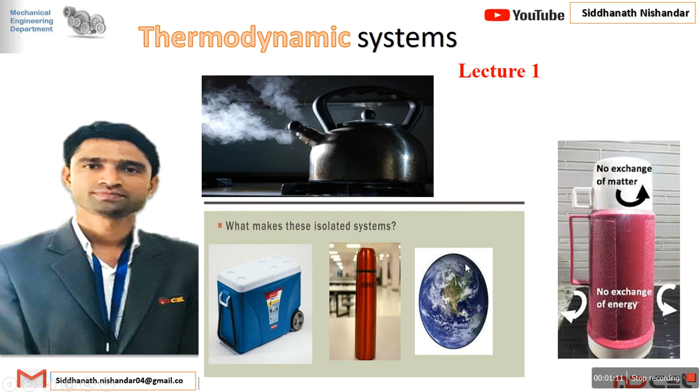Thermodynamic system, lecture 1. Now, what is meant by thermodynamics?

Thermodynamics is the science of energy and entropy. Now what is meant by entropy? We're going to discuss that in further chapters.

In today's lecture we just focus that thermodynamics is also called the science of energy, science of motion. The word thermodynamics is derived from a Greek word. If you divide it into therm and dynamics: therm means energy, and dynamics means motion, power, transport. So thermodynamics is nothing but heat power, also called energy transport. More importantly, it is the relationship between heat, work, and forms of energy. So thermodynamics is generally the science of energy, science of motion, and always correlates the relation between heat, work and forms of energy.

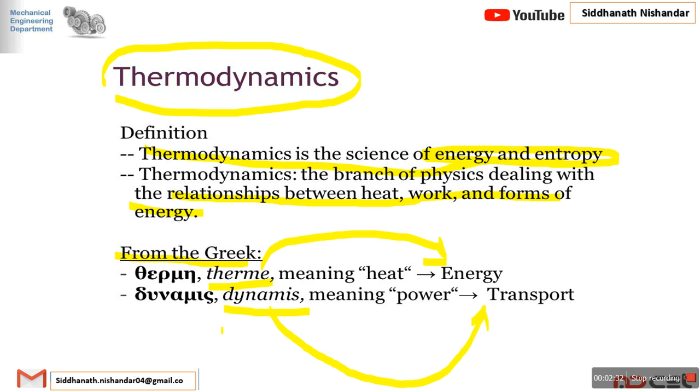This thermodynamic system is divided into two parts. In this first lecture I am going to cover the fundamental definitions and concepts, and in the second lecture, part 2, we have to apply these thermodynamic systems.

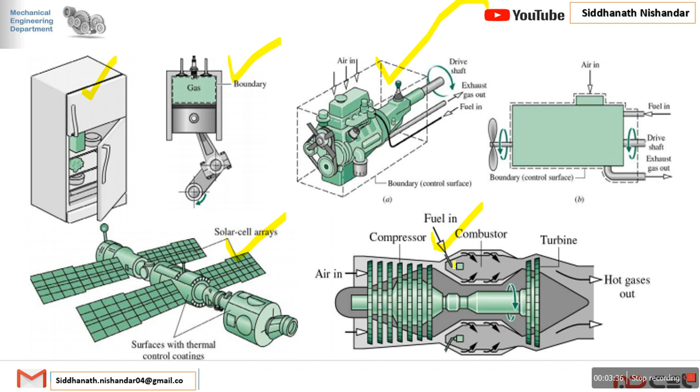Let me start with the definition of system. The system is the particular region or area or space where some thermodynamic activity takes place. If you take a particular region from the universe under study, it is also called a system. Everything outside the system is called the surrounding, and the system and surrounding are separated by the system boundary.

Now let's apply these definitions through an example. We take a piston cylinder arrangement enclosed with gas. In this case, the system acts as the inside surface area of the cylinder, which is equipped with the gas - that acts as the system.

Everything outside of the system - the outside area of the cylinder - is called the surrounding, and the system and surrounding are separated by the system boundary. The boundary acts as the inside surface area of the cylinder, and the system includes the whole volume along with the gas.

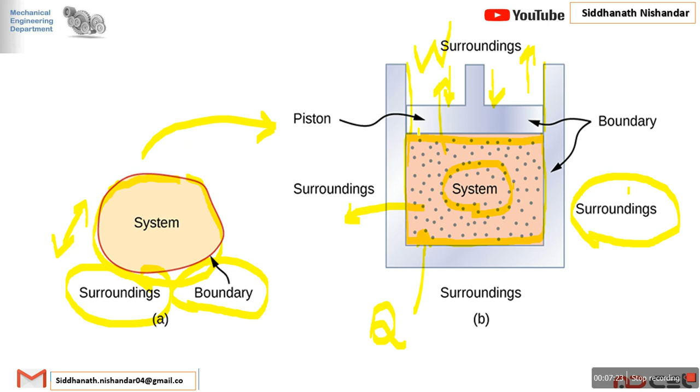When applying W, the gas compresses and releases heat to the surrounding. When supplying heat, the gas expands and gives W. So there is a transformation of energy according to thermodynamics - a relation between heat and work. Similarly, we understand the outside area of the cylinder acts as the surrounding.

Okay, now the very important terms, the types of boundaries. If you see in that example, the boundary is movable. If you're going to compress this gas, this boundary decreases.

When applying force, what happens? The system boundary decreases. And when I'm supplying heat, that system boundary increases. So such type of boundaries are called movable boundaries.

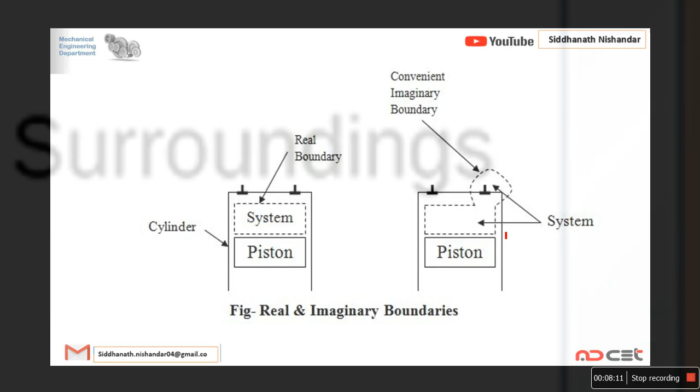Now if you see the further slides, what is meant by imaginary boundaries and real boundaries? In the previous example, we saw the real boundaries.

Now the imaginary boundaries - what happens in case of an IC engine? During the exhaust stroke, the gases are released to the atmosphere, and that gas boundary spreads to the atmosphere. So it is very difficult to trace that boundary. Such a boundary is called an imaginary boundary.

If we also study fluid mechanics, for the derivation we take a particular area or cross section of a pipe - that inlet area and outlet area of the pipe, we also call these imaginary boundaries.

Hope you understood the fundamental definitions - what is the system, surrounding, system boundaries, fixed boundary and real boundaries.

Before starting the types of thermodynamic system, let's recall the concept of thermal equilibrium. What is thermal equilibrium? No change with respect to temperature, no temperature gradient.

What does it indicate? If you see a hot cup of tea or coffee with respect to time, it releases heat to the surrounding, and after a certain interval of time, the temperature of that coffee or tea becomes the same as the surrounding temperature.

We know that heat always flows from a higher temperature body to a lower temperature body. So the surrounding heat warms this cold drink up until it becomes in equilibrium. So when a body is brought in contact with another body at a temperature difference, heat is transferred from the body at higher temperature to the one at lower temperature till both attain thermal equilibrium.

Now starting the main part of today's lecture - thermodynamic systems. The thermodynamic system is generally classified into closed system, open system, and isolated system. But actually the three systems are mainly classified into two groups: control mass and control volume. In the next lecture we'll understand the actual concept of control mass and control volume. Today we just focus on the actual definitions of closed system, isolated system, and open system.

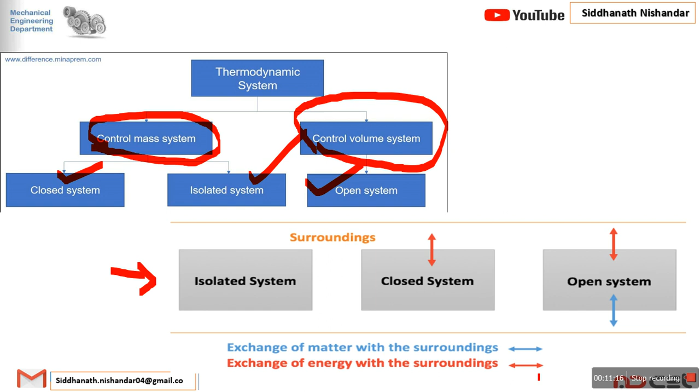There is one symbolic representation of the systems. The exchange of matter with the surrounding is indicated by a blue arrow, and the exchange of energy with the surrounding is indicated by a red arrow. In case of an isolated system, there are no arrows - this indicates there is no exchange of matter and no exchange of energy. So such a system is called an isolated system.

In case of a closed system, we see only the red arrow - there is only exchange of energy, no exchange of matter. And in case of an open system, there is the red arrow for exchange of energy and the blue arrow indicating exchange of matter, and that arrow crosses the boundary of the system.

So let me conclude the definitions. In an open system, there is exchange of energy as well as matter or mass across the boundary of the system - this is called an open system.

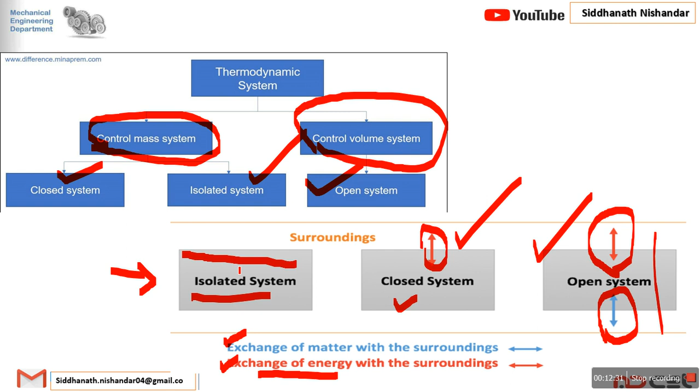In a closed system, there is exchange of energy takes place, but no exchange of mass across the boundary of the system - there is only energy. That is a closed system. And where there is no exchange of energy and no exchange of matter or mass, that is called an isolated system. These are very important.

Okay, let's look at some day-to-day life examples. In a closed system, there is only transformation of energy. This shows a pot or pressure cooker covered with a plate. If you heat it, energy is transferred via radiation and conduction, but there is no transformation of mass because the chamber or pot is closed with the plate.

So there is no evaporation taking place - it opposes the evaporation. There is no transformation of mass, only transformation of energy. If you remove the plate, what happens? Evaporation starts going on, so some mass is released to the surrounding. If you remove the plate, the system is converted into an open system.

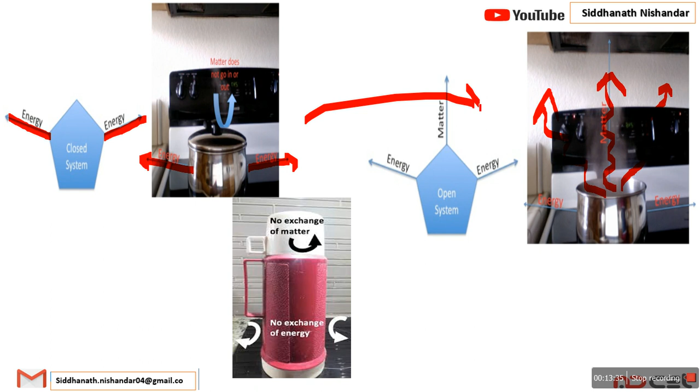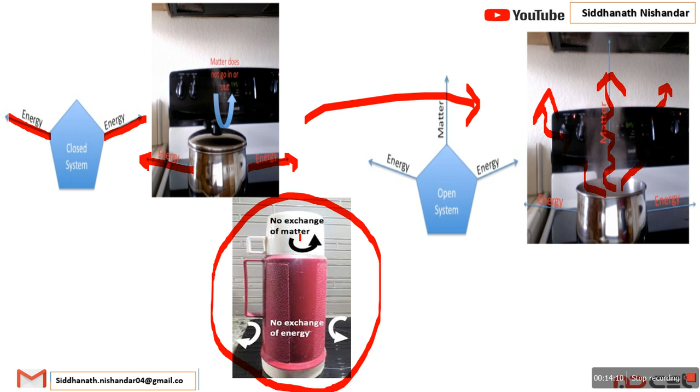There is another example - the thermos flask. The thermos flask is the best example of an isolated system. If we keep a cold drink or hot coffee in it, it remains at the same temperature because the system and surroundings are separated by vacuum, evacuated tubes, or glass wool, which protects it from losing heat to the surrounding. This thermos flask is the best example of an isolated system - there is no exchange of energy, no exchange of matter, so it's called an isolated system.

Hope you understood the fundamental concepts of thermodynamic systems, thermal equilibrium and the definitions. Next lecture we are going to apply these systems to further applications.